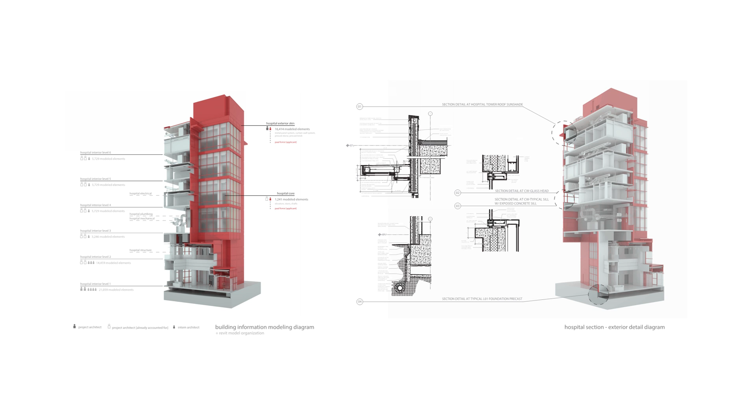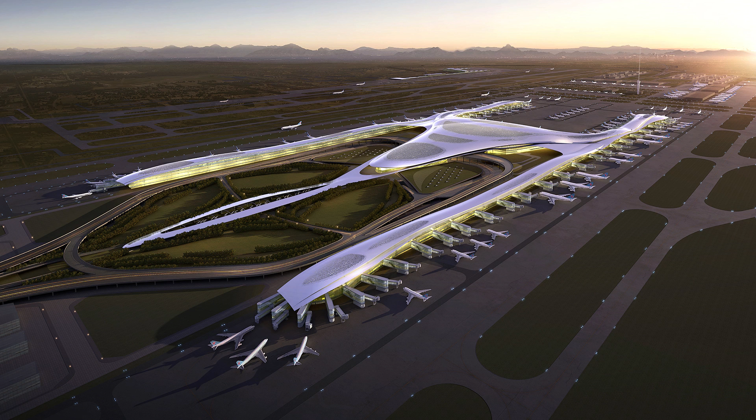The question we get an awful lot is, why is that necessary? Why would you ever need to do those things? Indeed, most of the work we do is capable of being built out of fairly regular construction assemblies. This is a project I worked on a few years back, and this is the definition of a complex project: Fort Hood Replacement Hospital in Killeen, Texas, roughly 1 million square feet. We had 30 or so subconsultants, and it took us 4 to 5 years to finally get it off the ground, and it just opened recently. This followed a workflow that was very repeatable, and after we got everything figured out, it was actually quite efficient. This works great, but occasionally we like to design projects that look like this. Then that workflow is not quite as clear-cut, and there's not a whole lot of dimensionable things going on. What we have is a lot of very complicated geometry that needs to be carefully communicated to the fabricator, and then we have to figure out how to build this as a kit of repeatable elements so it's not astronomically expensive.

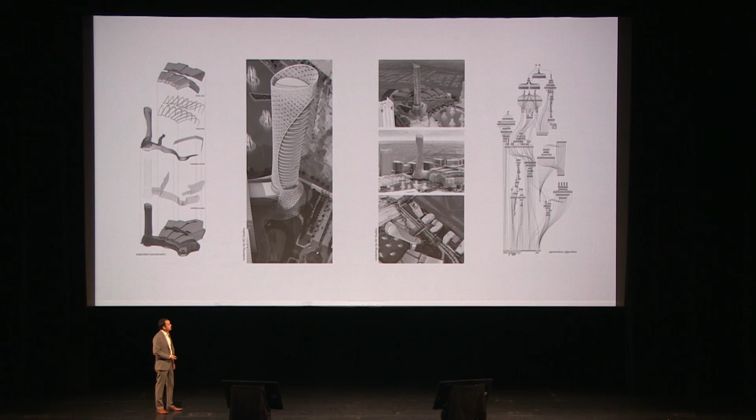Within HKS-Line, my role is that of a computational designer, meaning I use computer programming to manipulate data during the design process. That data is sometimes geometry, but it doesn't necessarily have to be. If you're building shapes that twist and curve like this, it makes sense to build them as a relationship of elements within the computer rather than as a fixed modeled object. That way, as the design changes, you don't have to rebuild everything. But the real benefit of this type of workflow isn't just making twisty, curvy shapes, although it is really fun and we do it a lot. The real benefit is being able to make things talk to one another that might not have been able to do that before, or were never designed to. So I'm going to focus on that primarily here.

So you guys are familiar with the new Vikings stadium. What you might not be as familiar with is the genesis of this one, and it actually started out looking a little bit different. It started out looking like this.

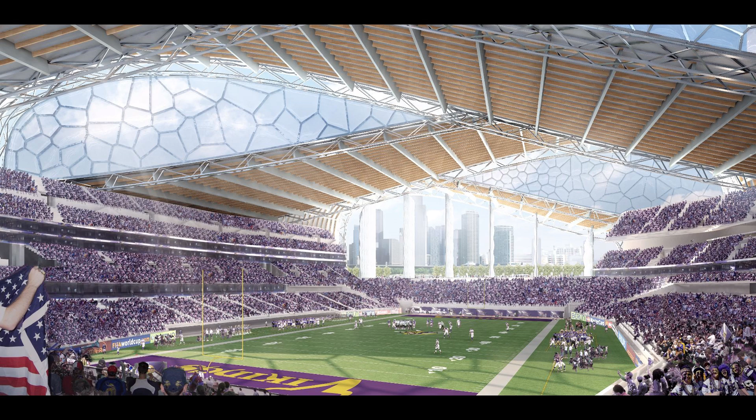My team produced one of the initial concepts for the design phase, and it's actually cool - some of the final elements made it all the way into the built project, like the big rotating doors at the end zones, and then the ETFE clear panels, although they're being used as part of a structural clerestory. But this project stands out in our mind just because of how fast we were able to do it.

We did this entire thing, including the renderings and everything, in about 4 days. It was by no means a perfect process, but we were able to define a very clear design direction and then add a very large amount of supporting detail quite quickly, purely through scripting.

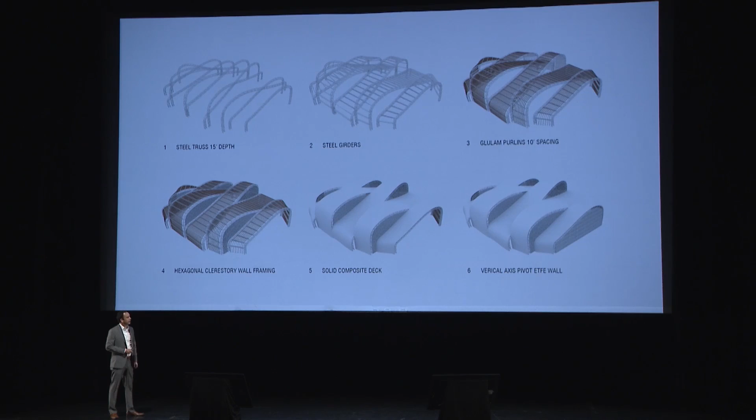So everything here is being built in Grasshopper. All of the elements here are basically being derived off of a series of 6 input curves that can control each one of these roof sweeps. Grasshopper is a plugin for the Rhino 3D modeler - it's very similar to Dynamo in many respects.

The coolest thing about this project to me was that those roof slices were not random. This was very deliberately produced in order to optimize the amount of natural daylight that was going to be falling on the playing field. We wanted this experience of playing football outside to be preserved, and we also wanted to make sure that we could block any direct glare from the players and for the fans.

So to do this, we hooked up the geometry of the model to a radiance-based daylight simulation, and this was the first time we'd actually been able to do this on a project. It's not uncommon to be able to build something and then simulate it, or run an energy model on it. But to actually make use of that as part of the design, so as you change something, you get instant feedback - that was something we've been trying to do for a while.

This is actually what excites me the most about the possibilities of computational design. It's what I specialize in within the Line group, and that is using the results of various simulations to iteratively influence how the design is going to finally progress.

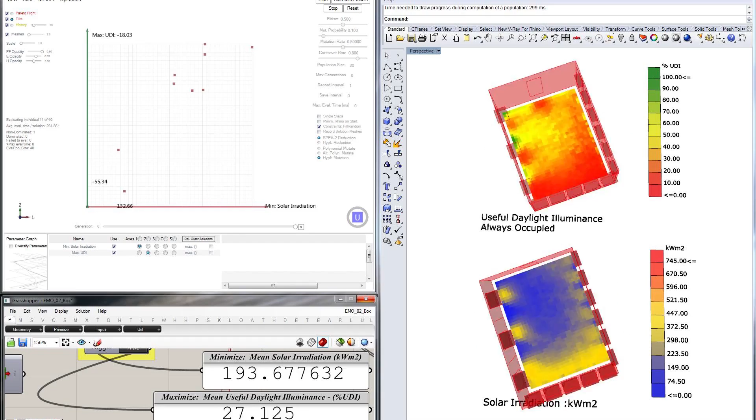This video looks complicated, but it's actually a relatively simple way to explain how that works. So what we're doing here is providing a series of simulations and then linking them to the creation of geometry to answer a question.

Right now I've got a very small volume. I've given it the ability to rotate back and forth, add and remove windows on all the different facades, and then also mess with the shading on the outside.

Then using something called an evolutionary solver, the computer looks at each frame of these simulations. We've got a useful daylight study and a solar radiation study, and useful daylight is described as daylight that's neither too bright nor too dark. For each option, it's going through and plotting the results up here in the left corner, and using an evolutionary solver, the computer can then start to understand which combinations of all these parameters will go together to provide the best results.

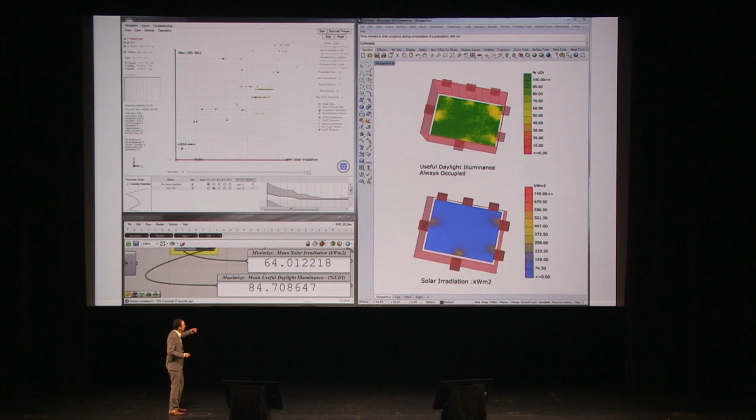You're in charge of defining what the best results actually are. So here I'm asking it to minimize the amount of radiation coming into the building, and then maximize the amount of daylight. It starts off bouncing around a little bit, but overall it starts to gravitate towards a solution that favors northern light, and then shading and minimizing the amount of light coming in from the south and the west.

This is something that makes sense intuitively. We would try to do this on our own, but the computer's actually figuring it out mostly by itself with a little help from us. Obviously this is answering just one question out of a nearly infinite number of questions you could be asking while designing a project. But the takeaway is that we try to use the computer for what it's good at, which is crunching numbers repetitively over and over again - and that frees us up to think more holistically about the design.

How can we make buildings that at a base level are more responsive and more sustainable?

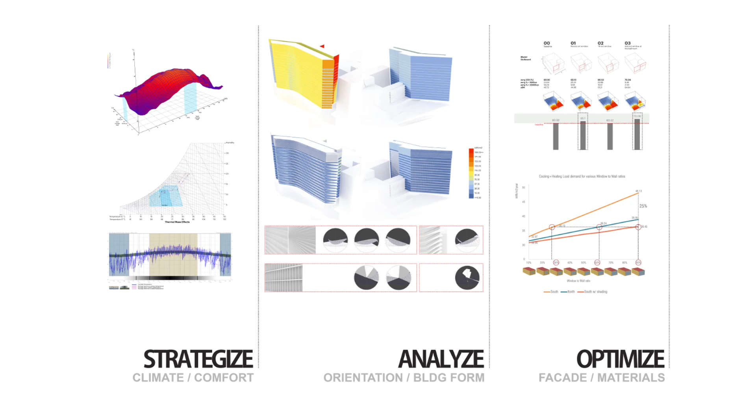To see what that looks like on an actual built project, this is San Francisco International Airport, one that we're almost finished with. We were brought in on the design side at the very early stages, and then after the project was secured, we became a consultant again. Here we were trying to figure out how to unify the workflow between the design architects and what ended up being a small army of sustainability engineers.

As this is San Francisco, they're very interested in the sustainability of the project. So what we were trying to do is look at every single design change we would make to the geometry and then see how that would play out in the overall performance of the building. This chart shows how work would flow from HKS and Woods Bagot, the design architects, and then flow into our mechanical engineers and our sustainability engineers.

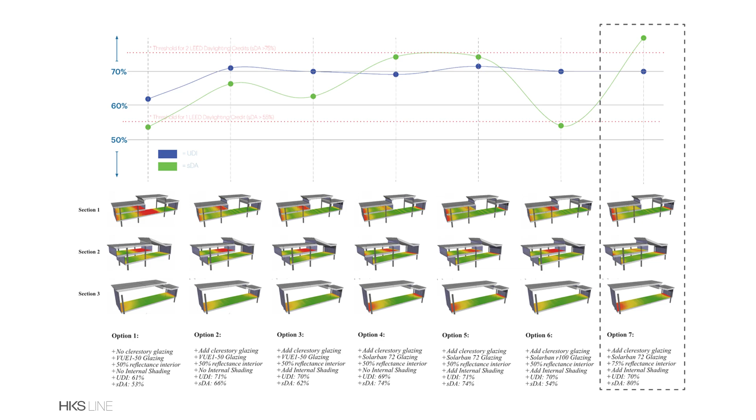Using Grasshopper as the intermediary between all of these different platforms, we were able to take each design option and very quickly run a lifecycle analysis, depicted here courtesy of Arup Engineering, and then also go through a conceptual level energy model as well as a passenger comfort evaluation. For things where we wanted more specificity for certain systems, that's where those evolutionary solvers come in.

This one in particular is trying to figure out if the building can qualify for the LEED V4 daylight credit. This is a small area for demonstration, but what it's doing is choosing shading options and running the series of LEED V4 daylight studies, which is spatial daylight autonomy and annual sunlight exposure, then charting the results to find out which ones will qualify.

I'm also defining a couple things in the upper left-hand corner that we're also trying to look at, which is bringing the shade area down to minimize costs, and then also switching out various spectral profiles of the glazing so we can see how that impacts the quality of the daylight. Lawrence Berkeley Laboratories out in California has a fantastic database of pretty much every glass type you could ever run into in North America, and we're testing some of our favorites there.

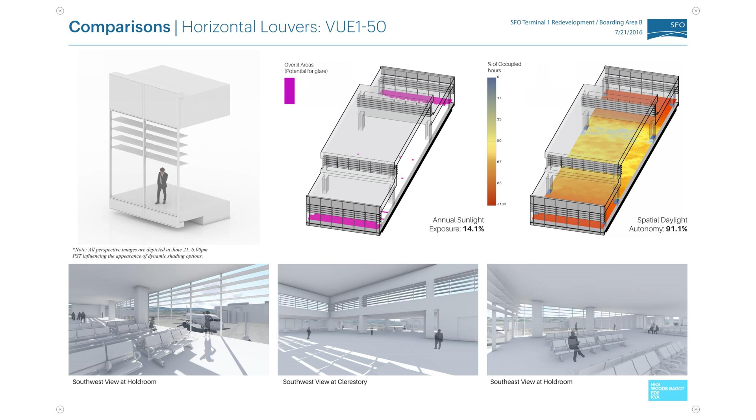The beauty of this is that you can look at so many more options than you would normally have time for given a compressed schedule, and then take the options that meet both the aesthetic and the performance criteria you're looking for, and bring them to the client with a very high degree of certainty that what you are providing is best for the scenario.

This next project is Kuwait Children's Hospital. This is the only pediatric care center of this size in the Middle East, and it'll be one of the largest ones in the world when it's done. While SFO was mainly focused on optimizing certain systems with analyses, with this one we wanted to use those same tools to provide more input in the design of the facade itself.

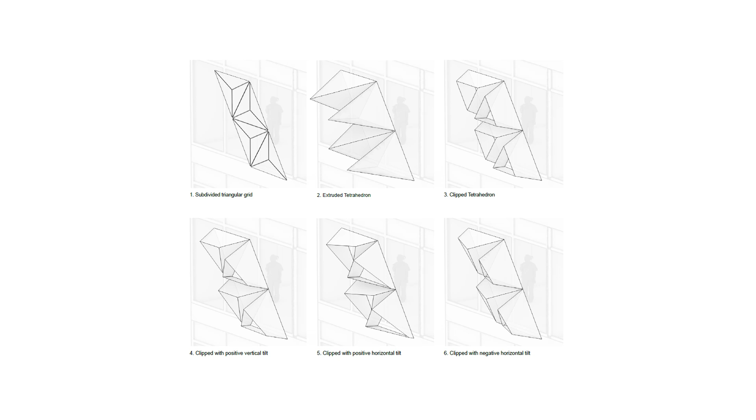One of the key design drivers for this project was that of a healing crystal, and you can see that language reflected in many areas of the interior and exterior. We started with this crystalline triangular grid for the facade, then developed a tetrahedral shading option and gave it the ability to twist and rotate with two goals: respect the program underneath the shade, but also provide a clear view to the Persian Gulf right outside the window.

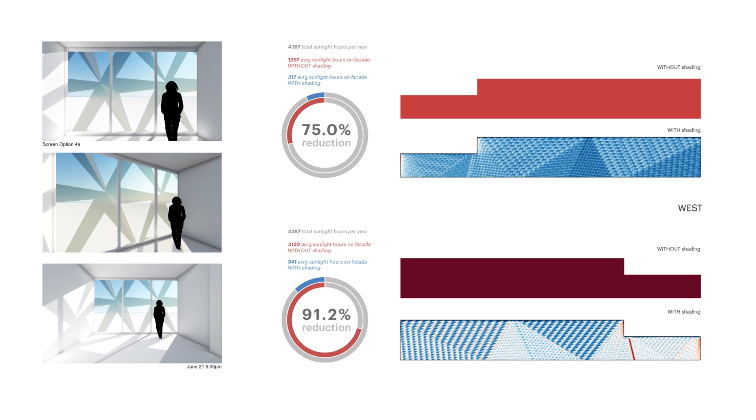It reduced the amount of insolation on the surface, which in the desert is a big deal, and we were able to maintain as clear a view to the Gulf as possible.

We also looked at the feasibility and payback of renewables, in this case photovoltaic arrays, both standard as well as BIPV. There's a chart that tells you the optimal orientation of a solar panel at any given point on the planet. But again, we used an evolutionary solver here to drill more specifically into our building and our context, looking at things like row spacing, rotation, and building overshadowing, making sure it makes perfect financial sense to put these panels where they go, because they are quite expensive.

At the end of the day, none of this really matters if you can't take all that information you've developed and studied and learned and apply it back to your final product, which as architects, usually that's a drawing set. This project was so large and spread out we had teams working simultaneously on 3 continents at one point, so we chose to use the Flux interoperability platform as a hub for all of our conceptual design information.

This is a screenshot of the Flux web interface, and we're creating all of our Grasshopper models and all of our simulations, throwing them in here as a repository, and then pulling out the stuff we need for the documentation model. Here you're seeing that same series of points being brought in, and we're developing the adaptive components that make up the majority of the skin. In fact, 80% of this building is made of adaptive components that are automatically generated off of that Grasshopper data.

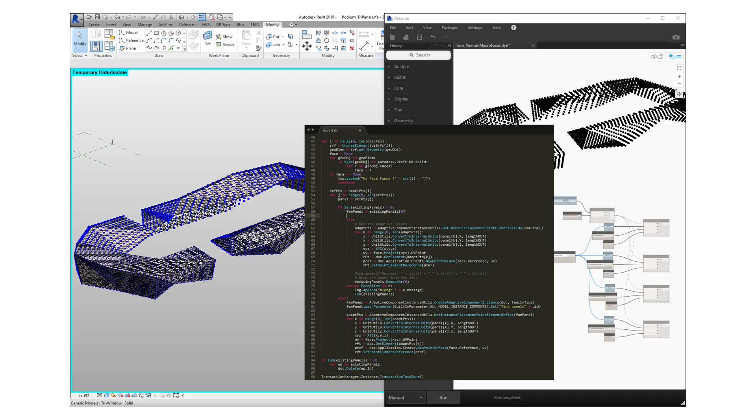The black window here in the middle is a Python scripting window. The reason we have that is the API of Revit is so large, it's massive, and Dynamo is still a relatively new way of looking at it. So oftentimes what we want to do with Dynamo is not actually set up to do that just yet, so we find that we're writing a lot of nodes to push and make that transition a lot more seamless.

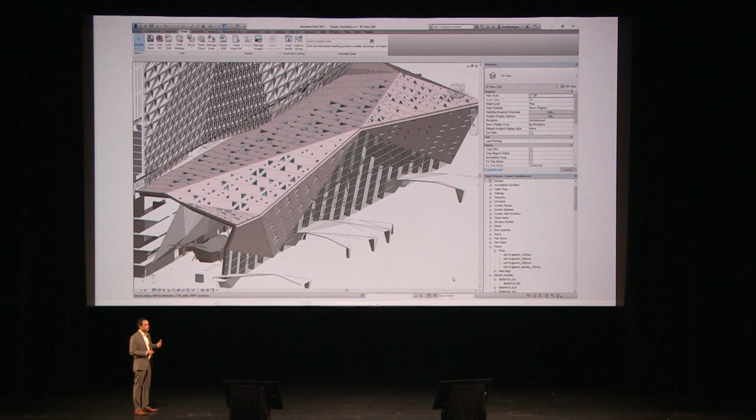But at the end of the day it's a fully functional Revit model that is directly connected and linked back to our simulation information. This is a fully connected workflow, so if someone makes a change in Grasshopper, it gets iteratively pushed into the Revit file, which is quite helpful because at the 11th hour of the 100% CD phase, I was still making pretty drastic changes to this facade based on new material information from our simulations. I would not have been able to do that - it would have been pencils down a lot earlier without this kind of workflow. So it helps in situations like that.

So we've been speaking about documentation challenges, and we go back to the Viking Stadium again. This is actually the project that inspired a lot of the workflows that I've just gone over in the last few slides.

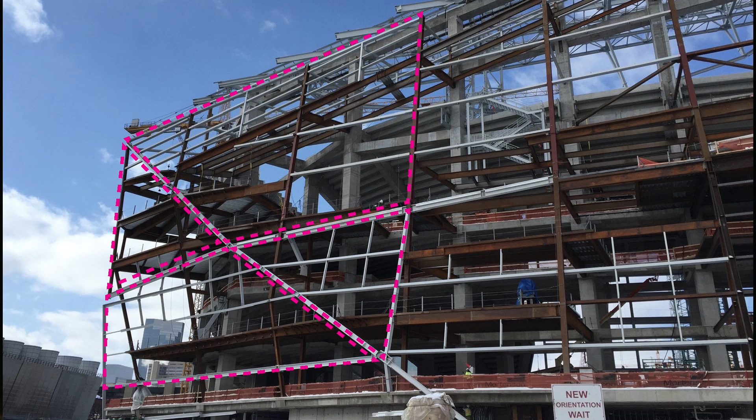Somewhere in the middle of the design process, in the documentation process, we realized that some of the macro surfaces of the stadium were actually curving in more than one direction. This became more of a problem as we tried to document the skin in Revit, because if you've used Revit, it really does not like twisting surfaces. So we went through several studies trying to reconcile putting a flat panel on a non-flat surface, and seeing how we could actually do that.

This is one of those studies - a growth algorithm that I wrote again in Grasshopper. What this is doing is taking a fixed panel and then arraying it up the design surfaces, trying to float the rotation and tilt within the construction tolerances of the panel system, which I think in this case was like 1/8 of an inch or something, just to see if we could actually physically build it.

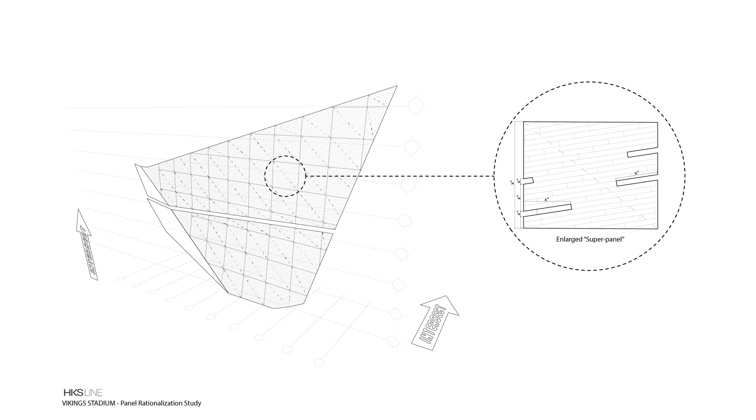That produced something like this that we could use in our documentation model, but there were still some serious concerns about how we were going to build it. Thankfully, working together with Thornton Tomasetti Engineering and Mortenson, we were able to figure out how to get these mapped properly, and they did a fantastic job of applying all the panels in the field. I mean, it looks quite good.

After Vikings, the concept of rationalizing non-uniform geometries into repeatable parts became a big focus for us, and it's a process we use quite a bit. We're using it currently on the Los Angeles Rams' new football stadium, which unfortunately I'm not allowed to talk about today. We're also using it on this development in Saudi Arabia, the Heart of Jeddah project. Each of these blue design surfaces is going to be made out of interlocking triangles, and right now in the design model there are roughly 30 to 40,000 of them, all completely different sizes.

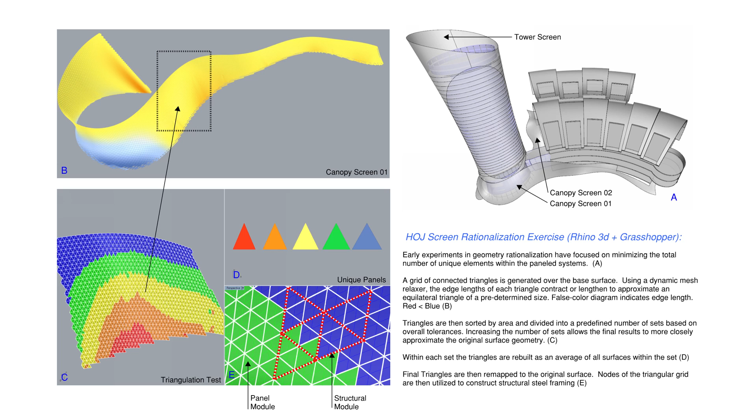So we've developed a rationalization algorithm that goes through and tries to bring that down to a more manageable number. In this case, we're able to go from that many thousands down to just 5 different shapes. And the process that makes that happen looks something like this.

We're now very firmly in the world of computer programming, and the goal here is to create one piece of software that can help with the design, but we're really trying to skip the documentation process entirely and take that file straight to fabrication, then start interfacing and writing G-code for the robots that are going to build and machine all of these different parts.

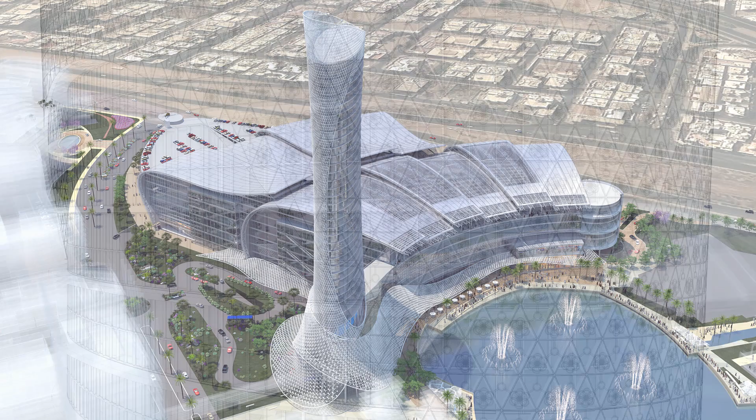To sum up everything, these projects are taking us in directions we would not have anticipated before we started. We found that the ability to remain flexible with our workflow is one of the most important things we have going for us. We like to remain platform agnostic, which is a phrase I'm not sure who coined, but it's a really good one. You find something that works for 90% of the stuff that you do.

For most of the work that our office does, Revit is the only tool we actually need. But there are some projects like these that need a little bit extra, and on these we're writing completely new tools, mostly from the ground up, to get those concepts actually pushed into reality. Thanks.

Thanks, Paul. Good job, thank you. Wow, computational design—that's fantastic, coming up with designs you may have never come up with on your own. Pretty fascinating, thank you so much. Now I really want to go to the stadium. Yeah, I totally want to go. Paul's presentation made me realize how envious I am of architects, and also how I could never be one at the same time. So once again, thank you, Paul, for presenting.

It was great to see your process and how you're using such tech to deliver projects, such as our wonderful new U.S. Bank Stadium. And we're somewhat staying within that project with our next presentation as well, but now from the contractor's perspective. All right, so moving on to the construction phase.

Our next presenter is Rick Khan, Senior Director of Project Solutions from Mortenson Construction, the general contractor on the U.S. Bank Stadium. Rick's focus is on enhancing today's project management processes with a strong focus on operational innovation for the future of construction. He leads Mortenson's integrated delivery advancement team, made up of over 60 VDC, virtual design and construction professionals, who drive and support the use of tools and technologies on projects.

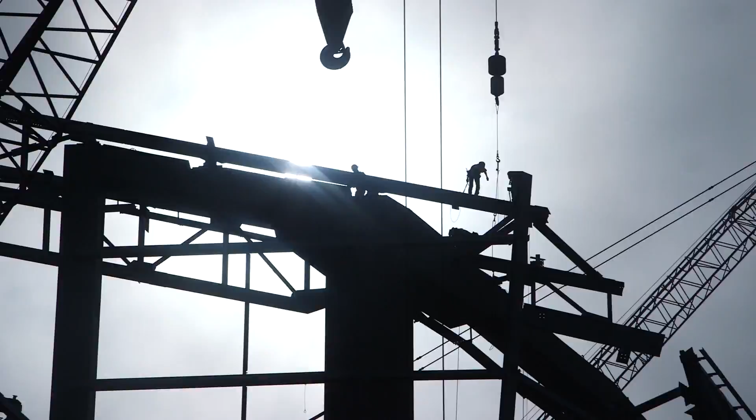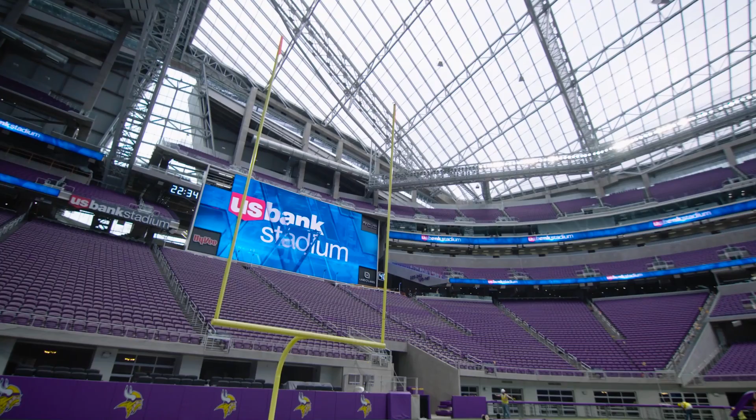All right, thank you everyone.

A little commercial to get you guys pumped up. It's an exciting project for our state of Minnesota, and it took over 8,600 people to design and build this project. So I'm telling just a small story of how we approach this complex project. A little bit about our company: Mortenson is a family-owned organization, 62 years strong, about 5,000 team members, and we do a diverse amount of projects. The things that get us going are the most complex projects—the more complex it is, that's what we want to sink our teeth into. And the U.S. Bank Stadium was no small feat to accomplish.

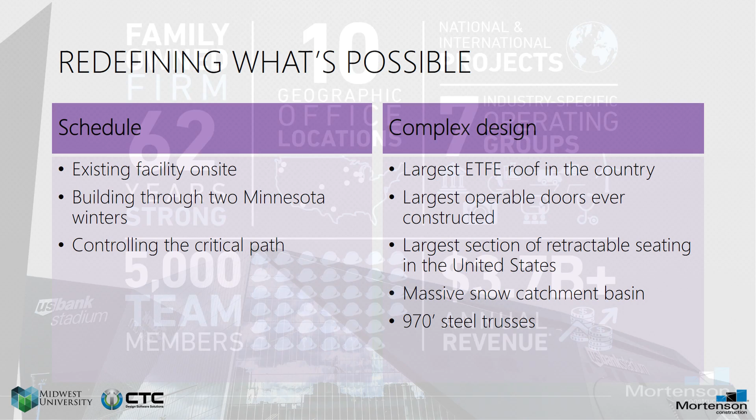The project has some key challenging elements. The first thing was time—we had to build through 2 cold Minnesota winters. We had an existing facility that we had to work around. And we had a lot of soil conditions.

We had bedrock at different levels within the project. We also had some very unique, complex features of this project, including the world's largest operable doors on a facility, the largest ETFE roof system that Paul talked about a little bit before, a massive snow catch basin, which is insane, 50 feet deep at certain spots, and a 38-degree grading angle that we had to accommodate for. And of course, this massive truss system that was a unique challenge on its own.

So you might think, what do we do to approach a problem like this when the design team has high expectations of delivering on the design intent, and our customer, the Sports Authority and the Minnesota Vikings, are hoping that we deliver on that promise? Well, it may sound super simplistic, but the reality is step one is building a plan. That plan is the key to how we successfully deliver projects of this caliber.

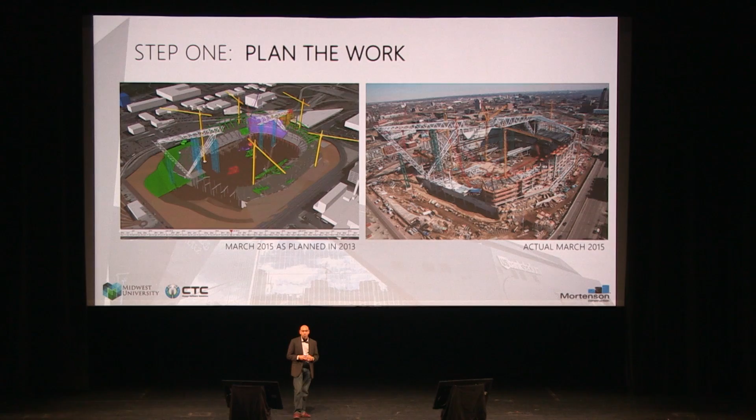And that plan starts off way in the beginning of concept and iterates throughout time. So the image on your left shows the 4D image of the plan from 2015, built in 2013. And you see the image on your right, which shows the actual.

Now, in a lot of cases, we had to really drive that critical path. So Mortenson was able to self-perform our concrete package, which was key to driving the critical path on this job, ensuring that all our trade partners, the folks who are really the experts, could help us deliver this project on time. So this is an example of the day-to-day technology we're using.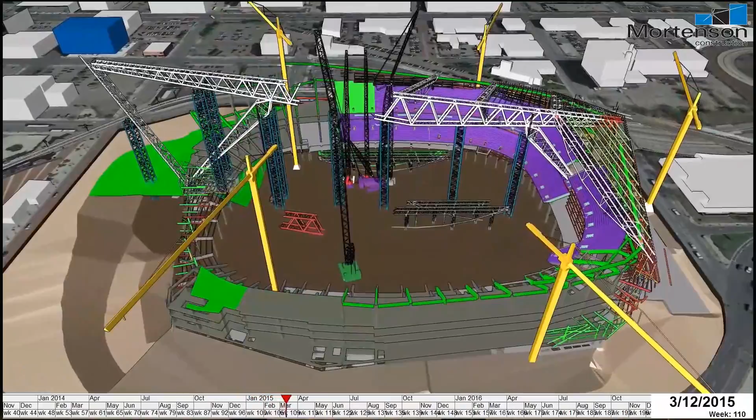The 4D plan is not something we just use for business development. It's something we use day-to-day. Our superintendents are driving this. There's over 100 iterations of this 4D model. This is the macro-level model, and you can see all the different scopes of work happening at the same time. For us, managing the flow of work is core to our success on any project.

At one time, there were over 15 mobile cranes within the bowl that needed to be coordinated. We were assembling the massive truss system, the shoring systems, as well as maintaining multiple crews of concrete to ensure that this project gets built on time. So this is just one example of how we're using that technology.

Again, it's not just a pretty picture and a cool animation. The superintendents are using this day to day. In terms of daily accountability, if you can't drive accountability to the plan, and if things get hard, and they always get hard and tough, we don't abandon our plan. We just shore it up.

But this is our pod meeting. It's a daily plan of the day meeting where we have all of our key trade partners, their supers, their foremen in, providing updates on their scope of work, holding them accountable and working with them to ensure we give them the support they need and remove the barriers, so they can execute work based on that plan. This is a meeting with Jason Brown and Dave Mansell, our key superintendents, orchestrating this massive project.

One team, lots of tech, one plan. Like Paul mentioned, being software agnostic is key. We get a lot of inputs, a tremendous amount of Autodesk products from AutoCAD, Revit, and Civil 3D, and all the other things as inputs from our design team. We also have a lot of our trade partners leveraging Autodesk products, or CATIA, like McGrath did, or Tekla. So from Mortenson's perspective, we have to be able to gather all those inputs, use a whole bunch of other technologies to ensure that we communicate that plan.

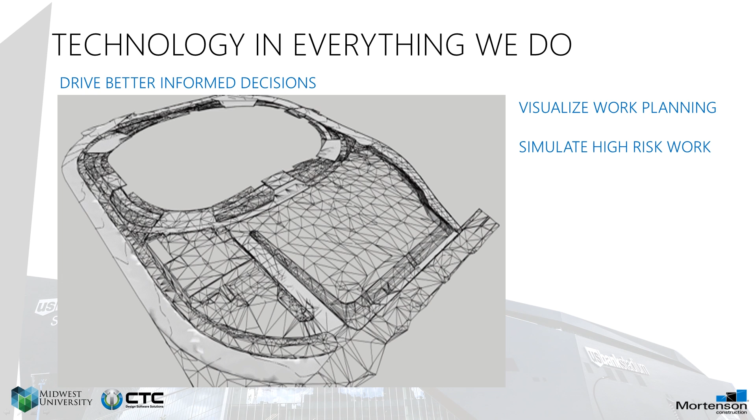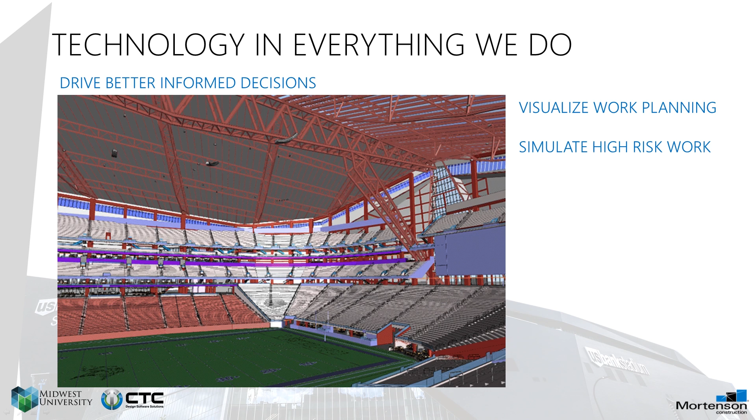So overall, we like to say technology is in everything we do. The reality is technology helps us visualize our work plan, and then we can simulate high-risk areas. That's really the core. The driver is to drive better informed decisions. It's all about ensuring that the teams can make the right decisions for the last planner, the last responsible person on the job site. So we use all kinds of technology, from mobile technology, cloud solutions, a ton of the Autodesk products, which has been a tremendous help for us, as well as a lot of other technologies.

In the beginning of the project, we needed to understand the existing conditions, so we implemented reality capture, laser scanning, and a number of other technologies to capture the existing topography and surrounding streets. This way we understand the existing infrastructure so we can better plan our logistics. This became a core starting point for developing our plan, understanding soil classifications and where bedrock was, and how the massive foundation structures were going to tie into that.

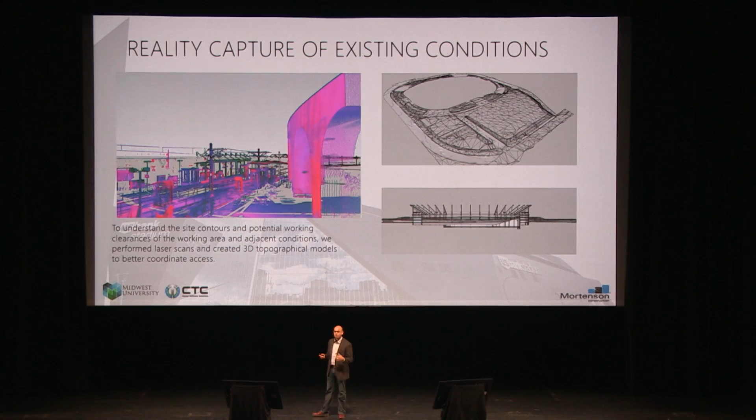All played a role in looking at concrete, which is the critical workflow, so we had to look at key areas. This image on the left is kind of misleading in terms of scale, but this is a 10 by 10 concrete thrust block that holds up the massive trusses on each side of the stadium.

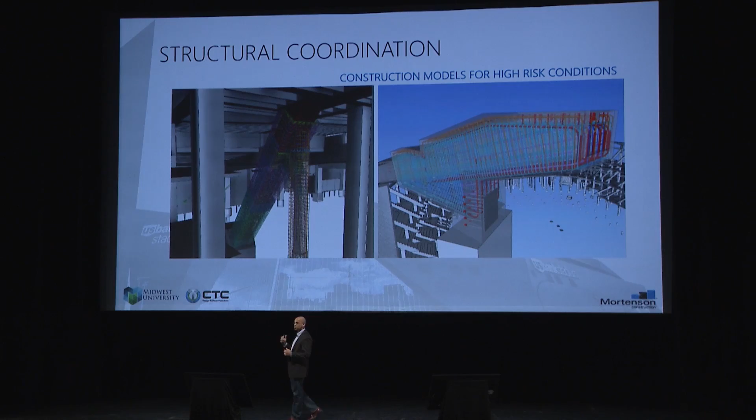We had to model the rebar. We worked with our trade partner, Harris, to ensure that all the embeds were placed right. The embed that holds up that thrust block is the size of a Volkswagen—a massive 3-ton embed that needed to be coordinated down to the anchor bolts, making sure all the systems connect. These are the type of things happening in the back of house that no one really sees, but that ensures we can effectively build it.

Looking at ways of breaking down the cranes, understanding how these cranes will fit inside the bowl, how we're going to break them down and move them, and making sure they stayed out of the way of logistics for assembling the massive shoring. We even looked at detail modeling of the pivot point and the operable doors. All these things are happening on a daily, hourly basis. We had a team of about 6 Mortenson VDC people on that job across multiple scopes of work, working with our trade partners and design partners to help ensure this was constructible.

After we're done with our coordination process, since we self-perform that type of work, we take that information and dumb it down into a digital 2D workflow, so our concrete crews know exactly what to build and how the systems are coordinated. We used Autodesk Point Layout a tremendous amount, understanding where the embeds were around these concrete systems.

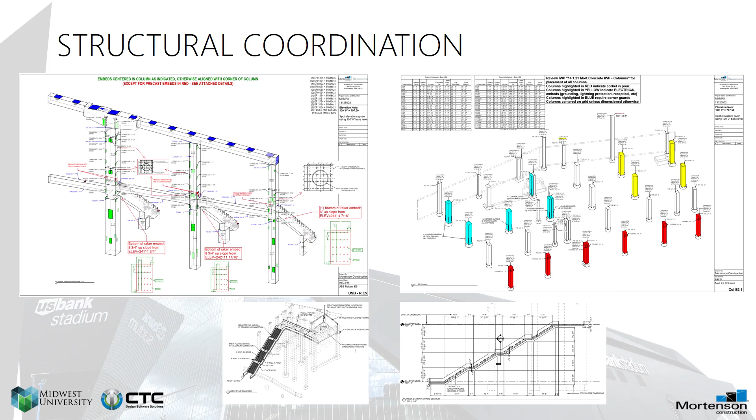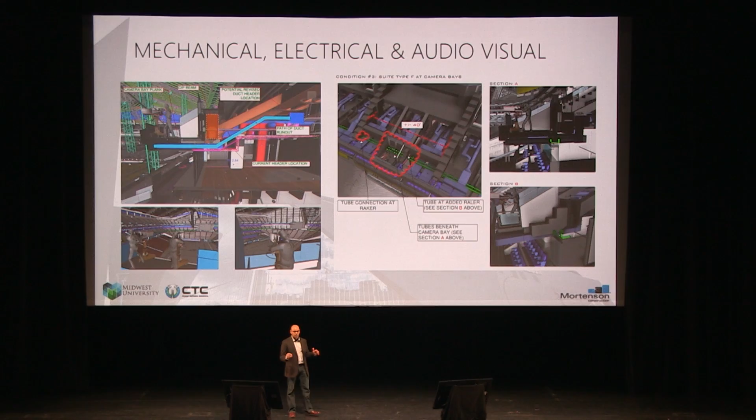We've always heard the term 3D coordination and MEP coordination. We like to talk about total building coordination, because the purpose isn't just to make sure things fit in confined and closed spaces, but really making sure the design intent is met by the construction process. That means tying into the audio, visual, and entertainment systems, making all these things operable. That's our goal in terms of 3D coordination—it's not just to fit, it's to make sure it's maintainable and operable. That was a tremendous effort from our trade partners and our team.

And of course, the enclosure—it's a beautiful enclosure, a fantastic facade. There was a tremendous amount of detailing that went into it. Paul touched on it a little bit. Because of the way the angular enclosure was built, we actually had to work with McGrath, the enclosure contractor, to understand the profiles, so we could connect the primary and secondary steel to the enclosure panels to ensure we maintained that complex structure.

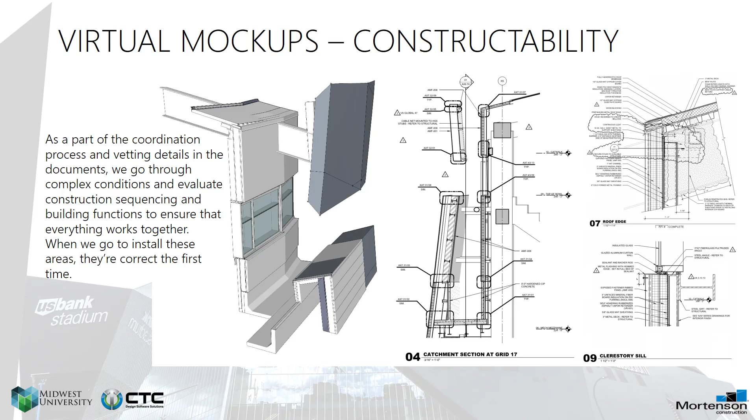These are just some of the types of modeling we're doing. We're taking the design information and the beautiful detailing in 2D and trying to create a model that represents that at a real scale, so we ensure that the flashings, fastening systems, and all the interfaces with water barriers and vapor barriers are being met in the detailing process. This is what we give to our teams to then go and build.

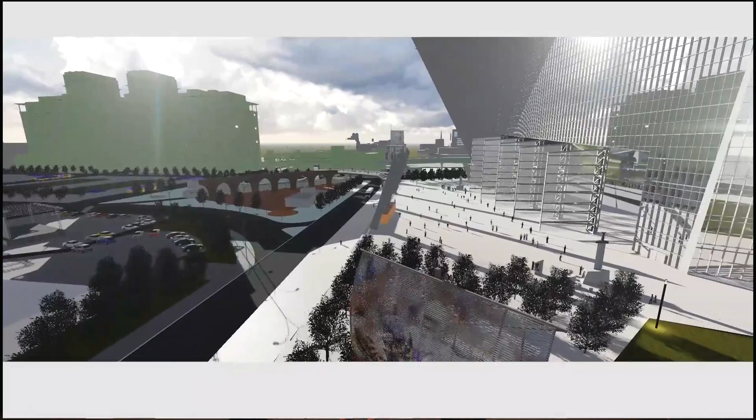Our models were pretty complex—it was a federated model, about 150 different models that made up the overall process. But the goal is to visually communicate, so we can execute right the first time. At the end of the day, we're just visualizing to communicate. The idea behind the visualization is to help us better communicate, which drives better collaboration within the team, which leads to better informed decisions. Getting the last planner to make the right decision at the right time as this project evolves is key to that process.

So in finishing up, I just wanted to show a quick video in terms of how our team looked at this project from a planning perspective.

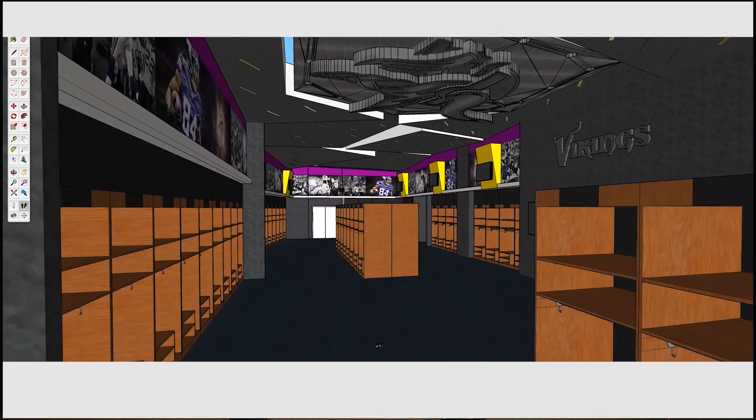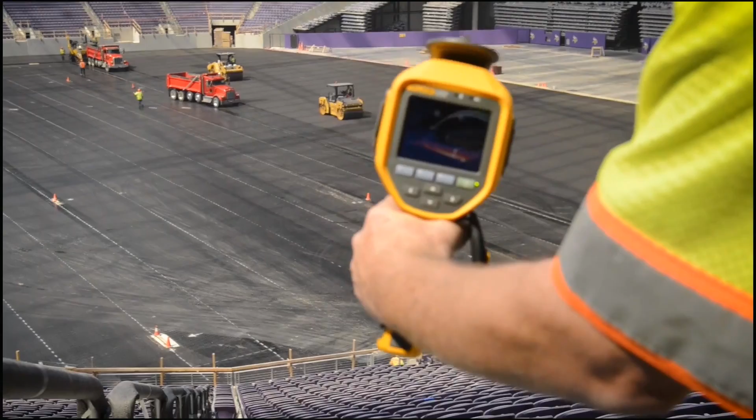When you win a project of this size and complexity, where do you start? You have to start with a plan. We spend more time planning, which equates to less time building. We utilize the most advanced tools in the industry, implement lean planning strategies, leverage our sports expertise, and hire the best people.

Mortenson, with the technology they have and the way they're able to show the job as it's going, makes it easier for every sub. You have a plan, and it's a pretty set plan. It makes everybody's job much easier. The job gets done in time, people are safe. With the planning so far in advance, a year in advance, we're able to plan for overhead, equipment, and everything else based on using that technology.

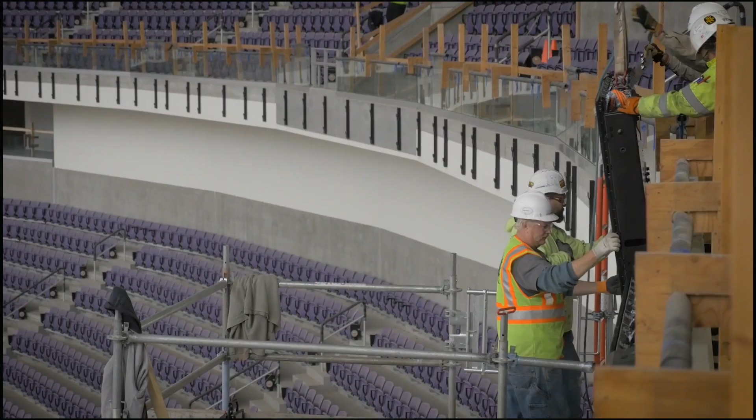Created by adding the element of time to a 3D model, the 4D model allows us to simulate hundreds of solutions and optimize the plan to create the best plan. It helps us visually communicate our plan to our trade partners and better collaborate and execute that plan.

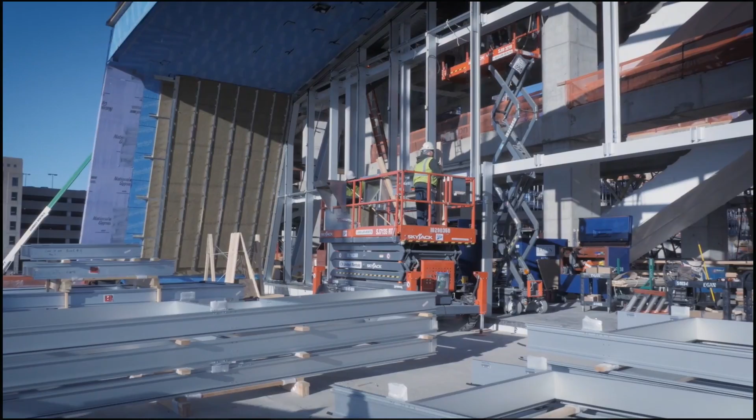The amount of technology used on this project, down to the day on every task, was quite the process and done very well. Having up-to-date drawings at everybody's fingertips was very important, and it was easy with the technology used, from the submittal exchange to the punch list. Everything was digitalized and easy to pass along. With all the different trades, it could be very easy to get documents lost. They did a very good job with the technology available to maximize that process.

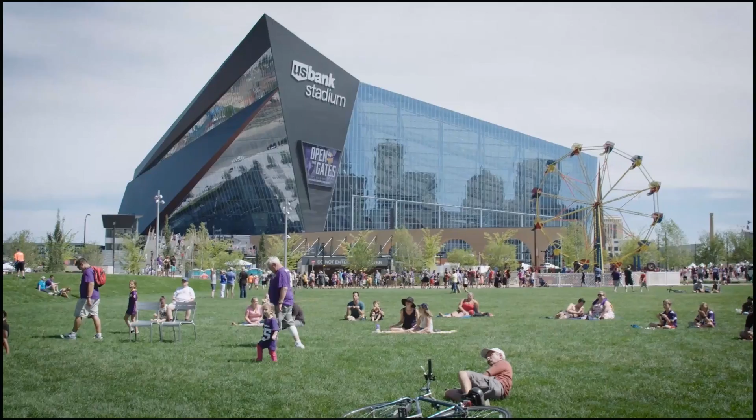Without 4D technology, construction would have taken a lot longer. Costs would have been accelerated. Mortenson had committed to using personnel familiar with this technology, and we ended up having the building before we even anticipated getting it.

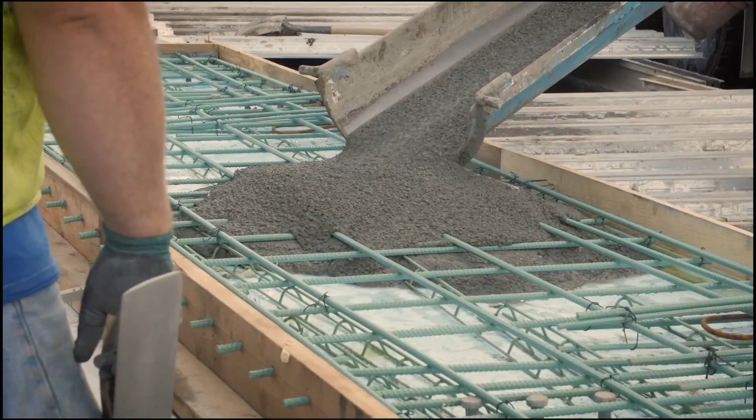Virtual reality technology gives us and our customers the ability to visualize completed spaces before any construction has begun. This is a critical tool to make informed decisions while saving time and money and creating the best possible solution. In addition, lean construction and quality prefabrication of materials advance the schedule more than traditional building practices. Our ability to identify opportunities to prefabricate materials and produce project components off-site absolutely delivers this project faster and with the high quality we require.

These tools, in conjunction with a comprehensive plan, are the reasons we were able to build the US Bank Stadium in a way that delivered the best value for taxpayers and the Vikings, while creating an iconic building resulting in early and under budget completion.

So redefining what's possible. We like to say we don't compete with our peers in the industry. We compete to what is possible. And that's what drives us. And it took a Herculean effort, over 8,600 people to design and build this project.

To deliver this project 6 weeks early, $6 million under budget, and at zero punch list on opening day. That is unheard of in the sports business. But we weren't able to do that without the partnership we have with our design partners and trade partners to be able to deliver this project at this level.

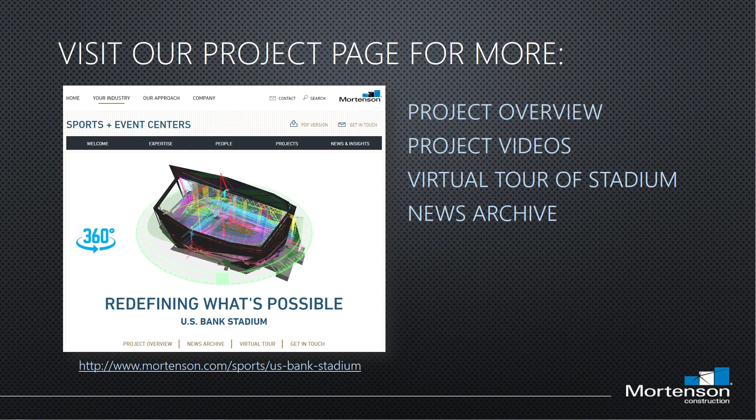Thanks, Rick. Thank you.

Wow, early and under budget. That always happens. They can build football stadiums. I wonder if they could help out with the offensive line. Now I really want to go to that. But yeah, that was excellent, Rick. That's amazing. Yeah, we really appreciate that amazing inside look at your processes.

It's certainly a challenging project with lots of risk. Awesome to see how you guys pulled it off, delivering it under budget and ahead of schedule.

Our next presenter is from ISG. They're a multidisciplinary firm with 230 employees, 8 offices across the Midwest. We asked them specifically to present on virtual desktop infrastructure, as we see this as a growing need among our client base as projects and firms are requiring to work more collaboratively from any location.

Right, right. And I mean, how many of you come from the IT side of things? Or my IT folks? Are you just afraid to admit it? Or... No? No one's gonna raise their hands? No? Some of you? I know there's gotta be a few of you. Okay, all right, okay. So we all know the value of a great IT department. We certainly know what happens when we do not have a great IT department, right?

And as we work more and more with different types of software, and we have more variables that we throw into the mix, such as remote users or working with dispersed project teams, and of course now that we have the cloud, a great IT department is more important than ever.

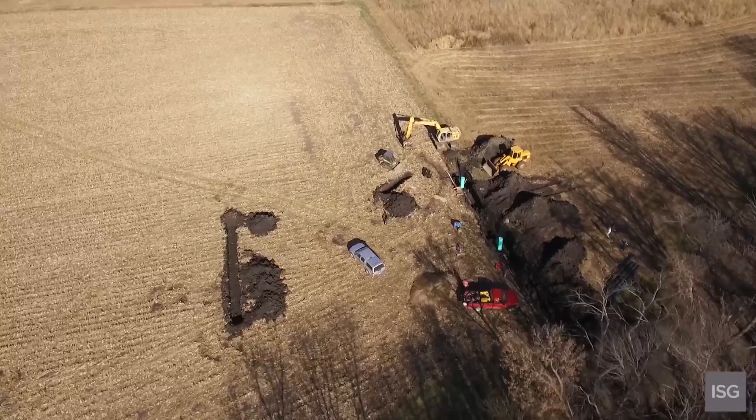At ISG, we've built our firm on ingenuity, innovation, and virtualization that has fueled projects across the nation. Through integration with virtual software and desktops to Autodesk, ISG has helped support efficient architecture, engineering, environmental, and planning solutions that have positively impacted communities and clients for the past 44 years.

Hi, I'm Chad Surprenant. I'm president of ISG. We look at technology as a way to differentiate ourselves. Historically, we've utilized technology to stay in front of things, be able to deliver our designs in a better fashion. And then over the last probably 5 years or so, it's been a huge transformational time for us.

The way we've been able to use our VMware has changed our way of delivery from something that was at one time more of a geographic-centric focus, and now we've actually changed our company so much more to a client-centric focus. By utilizing VM, we can be doing our work absolutely anywhere throughout the world.

Looking for ways to intimately connect clients to their projects, ISG has worked to instill a culture that promotes collaboration and flexibility, which translates into better results. ISG strives to not only continually push for success from our professionals, but also have technology that supports such efforts. We want to empower employees with an accessible and reliable solution that meets the demand for flexibility in today's workforce. VDI gives our employees the ability to run their work desktop on any device from any location.

The future possibilities in the A&E industry and technology to support such services are endless. Through intentional and strategic engagement, ISG will continue to push boundaries and empower professionals that will turn visions into reality.

Good morning. Welcome. I'm Eric Eby, Director of Information Technology at ISG. And I was asked to talk about VDI and virtual desktops and how ISG successfully runs VDI in an Autodesk environment.

So virtualization. We've all heard the term, whether that be cloud computing, as mentioned earlier, companies like VMware, Microsoft Hyper-V, Citrix. Virtualization at its core is simply running multiple servers or desktops on a single hardware host.

VDI, or virtual desktop infrastructure, is exactly that. It's running your work desktop virtualized on a server that sits in a data center, whether that be on-premise or in the cloud.

It's become mainstream in the last 5 years, and just within the last 3, they've introduced dedicated graphics. And that's what really allows us to run Autodesk products.

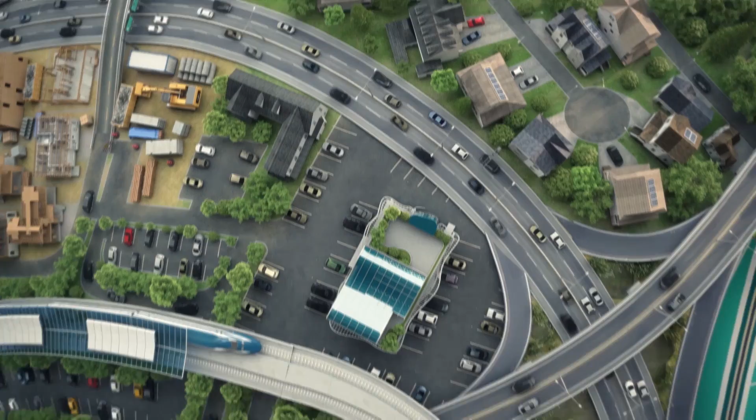So let's go ahead and talk about entering the era of connection. We've talked about our individual workflow solutions advantage for several years, the depth and breadth across the life cycle for building and infrastructure projects. But now the I in BIM is more powerful than ever. Information is everywhere, sensors are everywhere, and now everything can be geolocated. We are able to connect our solutions like never before. So let's take a look back so that we can better understand where we are headed.

Pretty cool video, huh?

More than 30 years ago, Autodesk software helped shift work from the drafting table to the computer with AutoCAD. We call this the era of documentation, helping designers, engineers, and contractors leverage digital technology to move from error-prone, inefficient manual processes. DWG became the standard in the industry.

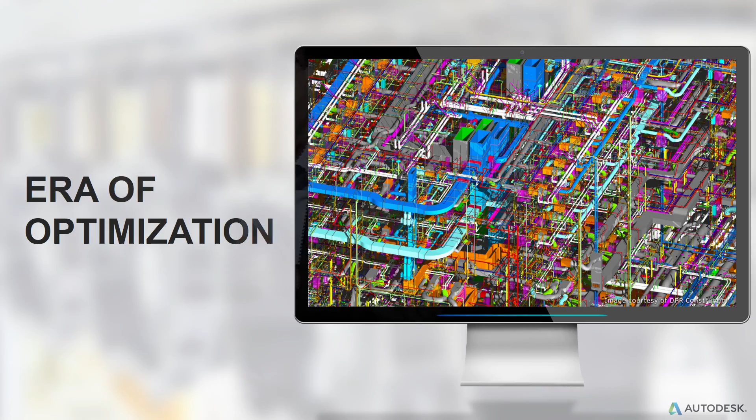Digital modeling technology then ushered in the era of optimization, along with building information modeling, or BIM. When we moved from 2D to 3D, Autodesk invested strongly to help the industry transition to BIM, and we're still doing that today with products and workflows that help visualize, simulate, and analyze designs before we break ground.

It's worth mentioning that we acquired Revit 15 years ago today. Isn't that amazing? How time flies.

And now we enter the era of connection. It's a new opportunity for builders, designers, engineers, and owner-operators, one where digitalization, the power of the cloud, and big data are changing everything, where the boundaries between planning, designing, and building are disappearing.

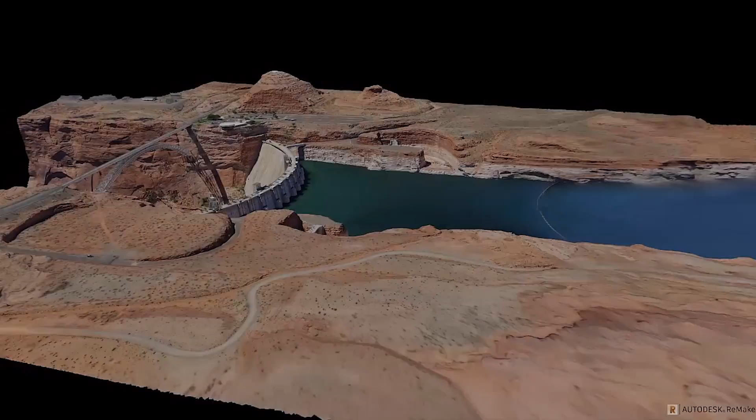The first trend is higher definition surveying. Current surveying methodology remains one of the major reasons why projects are delayed and go over budget. New technologies such as Autodesk ReMake, which integrate high definition photography, 3D laser scanning, and GIS, can dramatically improve accuracy and speed. This is another example of connecting digital and physical.

This is the Glen Canyon Dam, one of the largest man-made reservoirs, and a vital defense against severe droughts. This model will support education programs for operations and maintenance for years to come.

The second trend is around machine learning. Machine learning is a type of artificial intelligence that provides computers with the ability to learn without being programmed. Imagine if you feed these programs with past project information, what we can do.

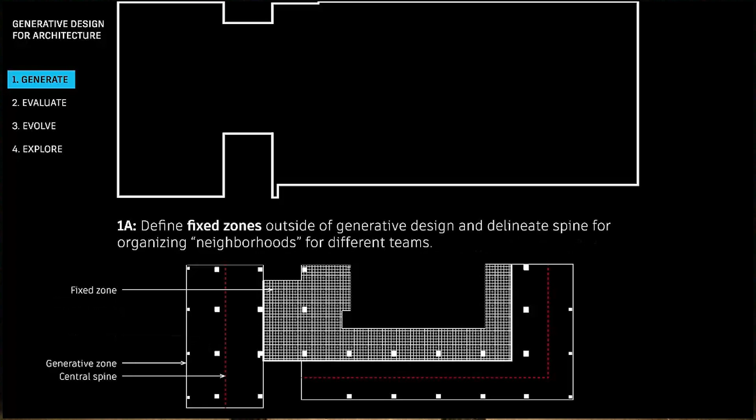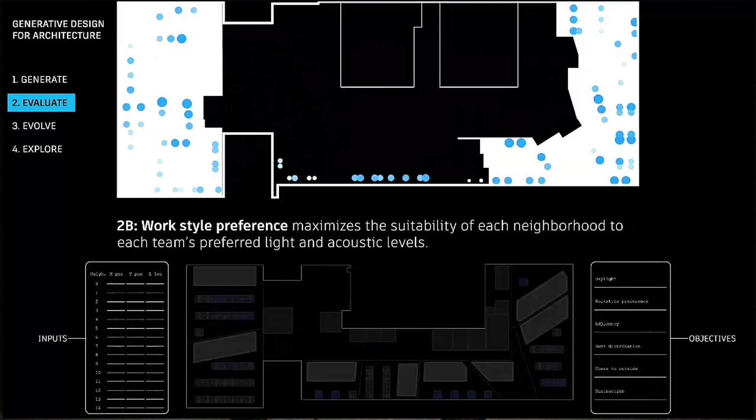This is a layout of our new Autodesk Toronto office. We did surveys of the employees, identifying work requirements and preferences up front, and we had to understand our design goals for increased productivity and collaboration. We then used generative design to lay out alternative designs and optimize for the best outcome. This learning will allow us to enhance the software you already use today. And by the way, we ended up with a pretty cool office.

The third trend is around digital visualization, mentioned earlier. Virtual reality is being adopted at an impressive speed. You've seen many phones that include headsets just in the last year. This is becoming a reality within the AEC segment as well. Let's see an example.

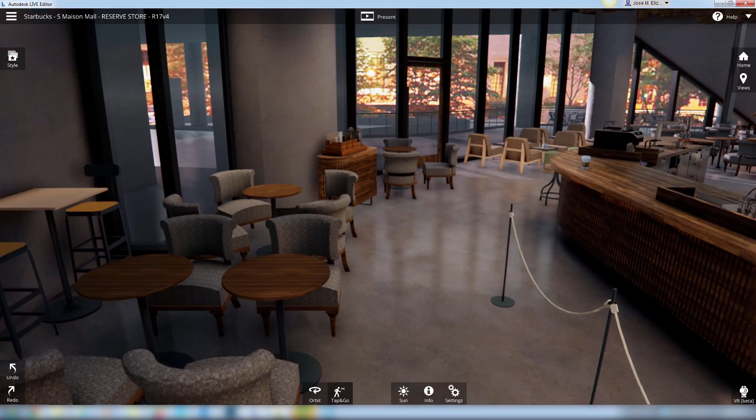Imagine immersing yourself in a coffee shop well before any construction begins, understanding experiences, lighting, layout, product placement, and much more. The accuracy and level of detail has come a long way, making this usable, even being able to provide field workers with a visual tool. Kind of makes me want to get a cup of coffee.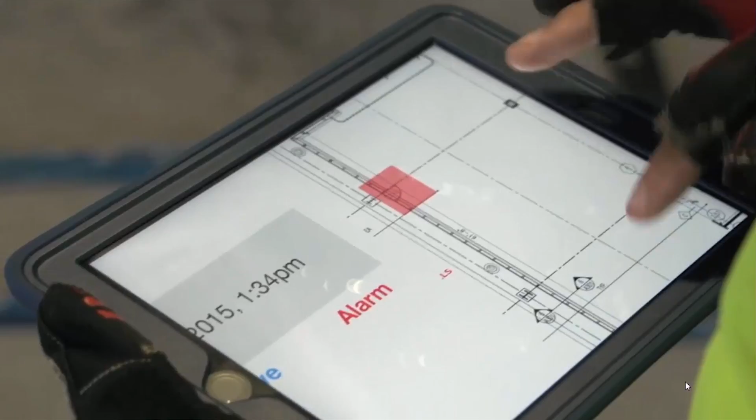This is Redpoint, an app designed to increase safety on the job site. Imagine if you could outline an area on a mobile device and then equip workers with a sensored vest that alerts not only the foreman but the workers when entering unsafe areas. This is another great example of connecting the digital and physical worlds together. Think of the possibilities—pretty cool.

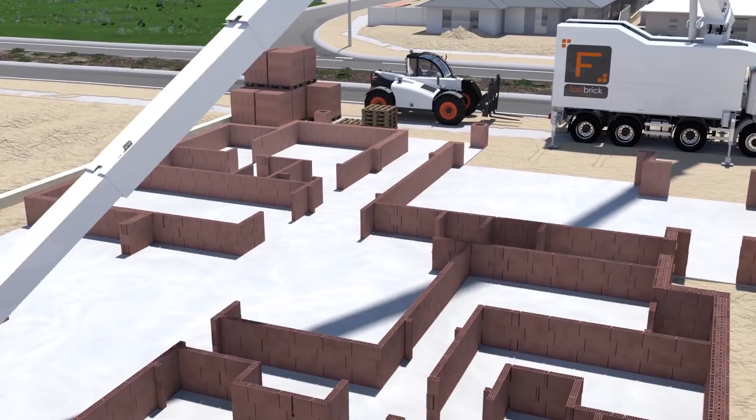3D printing technology has shown great promise for as long as I can remember, but now it's becoming reality. Fastbrick Robotics is pioneering innovation in construction, bringing this same technology on a larger scale to construction. Think of the quality, the cost savings, the benefits of such technology on the construction site—I think it's pretty amazing. Who would have dreamt that 3D printing technology could reach this level? Fastbrick Robotics—what are the possibilities? Really cool.

Autodesk is at the intersection of the need for more buildings and infrastructure, and at the same time, the democratization of technology. We are taking the lead in making these digital technologies relevant and valuable for our customers.

Now I'd like to turn this over to my colleague, Angi Izzi, who's going to show you what the era of connection means to our current product strategy as it relates to collaboration. Angi?

Thank you. Thanks, Ken. This is only my second invite to Midwest U, so hopefully I'll get a couple more invites in the future. Love being here in the Midwest. Thanks again for having me here.

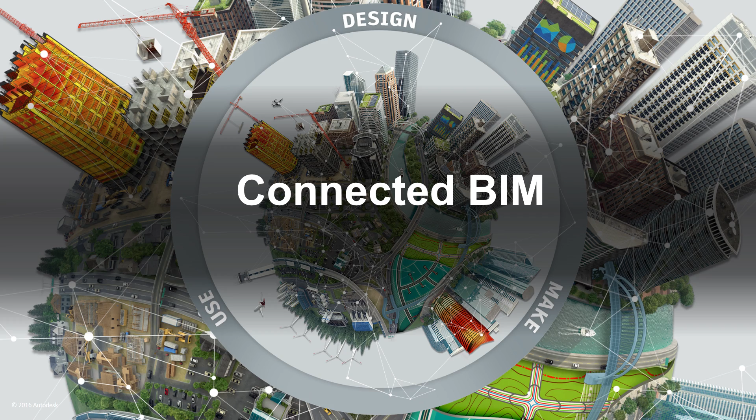As you saw earlier today, BIM was part of the success for this stadium project. This is really about enabling the entire lifecycle for design, build, and operate to seamlessly be connected. But what does connected BIM mean? It's not a product, it's not a process—it simply describes the potential value of BIM in tightly interconnected workflows, spanning design, build, and own processes for buildings and infrastructure. It's really about enabling Autodesk to help provide you software to do that.

So BIM is the power of the cloud. It really allows us to look at a couple of things. We look at insight—really being able to have bidirectional information, like the coffee shop, for instance, providing insight into what's going on, what the building's going to look like. It enables continuity—real-time access, understanding in a common place what the most up-to-date design is. And then collaboration—being able to, in the mobile world we live in, have anytime access to that information.

Imagine a design project so complex that it requires dozens of stakeholder groups from across the globe to deliver it. And imagine them collaborating seamlessly to deliver a world-class building ahead of schedule and under budget, regardless of location, discipline, or software tool sets. Imagine them working together in a single project ecosystem—planning, designing, building, solving challenges, and making swift decisions based on deep insight—driving up profitability, driving down coordination issues. Welcome to the future of project delivery.

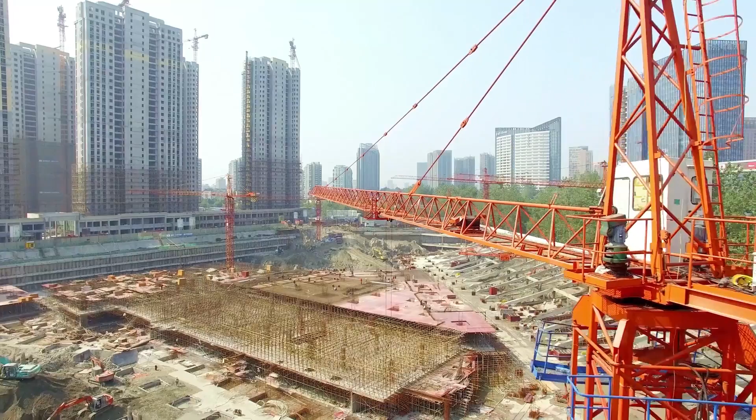This is the Autodesk Cloud made fluent in BIM. Beyond a place to simply store or share files, it will be the foundation for how teams deliver projects. Here will be a single project environment where design and construction teams will collaborate, design, review, and build as if in a single location. Here, insights into clashes, model changes, and quality control are easily accessible. Here, independent systems and toolsets work as one. Here, the design and construction teams are connected, with project documentation available in real time to those in the field. And here, all stakeholders are provided access to the right version of the right data in the right context and on the right device. When it comes to delivering projects, it is often the process that defines the success of the project. Welcome to a better process.

Welcome to the future of project delivery.

Pretty inspiring, huh? This really excites me. It makes me really proud to be working on this project.

So we want to talk a little bit about the trends that are driving this, the trends around project delivery. It really is around owners realizing the BIM mandates that are coming from owners today, and then understanding the greater project savings and the advancement of new standards. This is really important for driving the success for project delivery.

The other thing is designs are optimized. There's this high frequency of information that comes across the projects. You notice that in the stadium project, the information, especially on the generative design area, really have to be able to manage that information. And then the third thing is really around the distributed teams. It really is a great idea to be able to use the distributed talent from anywhere that they possibly can be across the world. And this is really driving this project delivery mechanism that we're putting together.

So let's take a step back for a moment and let's talk about how our customers deliver projects today. There's this massive amount of coordination that takes place, risk mitigation that takes place on all these projects. And we really need to understand how they go from design to documentation to construction handover and be able to use all that information to have the most up-to-date information, really around data management. And our portfolio today supports a lot of these projects during the phases of these projects.

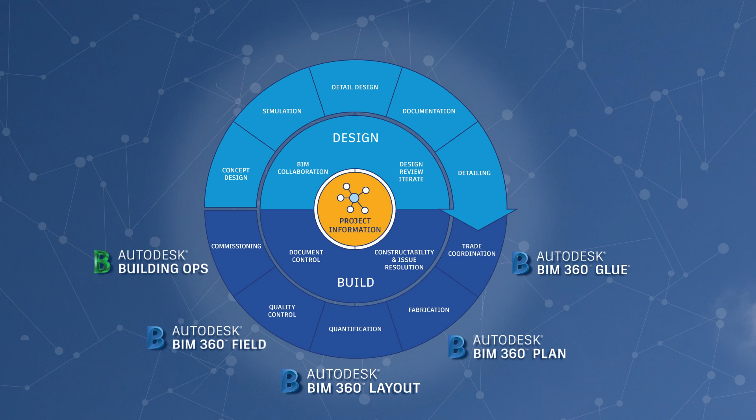So let's start with our established tools, really around certain tools that we've created for construction. Let's kind of start looking at these first. You heard a little bit about them from Mortenson today. Glue, field, layout - these are really around digitizing the construction site. And last year, we brought Autodesk Docs, we brought BIM 360 Docs to the field, really allowing construction documentation management.

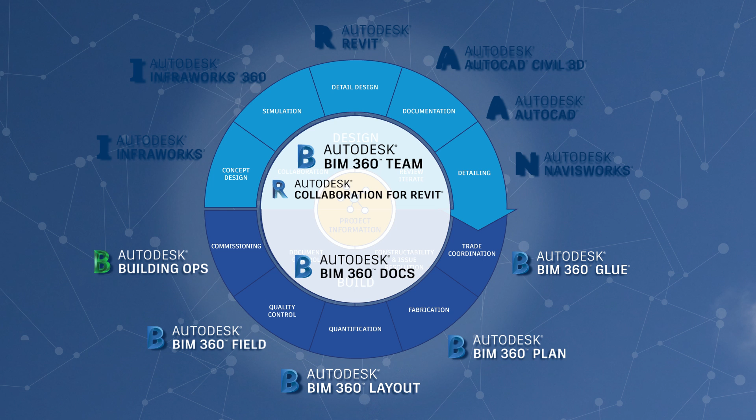Moving to the top, we actually have all these world-class solutions that we've had for authoring tools for many years, and now we're starting to connect them together in new, meaningful ways. And last year, we brought you BIM 360 Team as a way of connecting teams with Collaboration for Revit. Collaboration for Revit has really been the best-in-class cloud solution for allowing teams to collaborate together.

I'm here today to make a big announcement. The big announcement is BIM 360 is going to become our common data layer. It becomes our new brand for design, build, and operate, not just the construction tools. So this is really around allowing customers to really have alignment around the design, build, and operate of a building.

But that's not it. This all has to be in one common data environment. And we really, I shared with you that we have made this brand, the BIM 360 brand, our common data layer. But it really is not done. We're not done yet, because right now we kind of have a bifurcated stack. We have two separate offerings. We have the BIM 360 Team and the Docs.

I'm here today to tell you that we're combining these. This year they will become a unified stack. This will be a common data environment for designers, owners, operators, and construction to come to one place to work. This is very exciting for us.

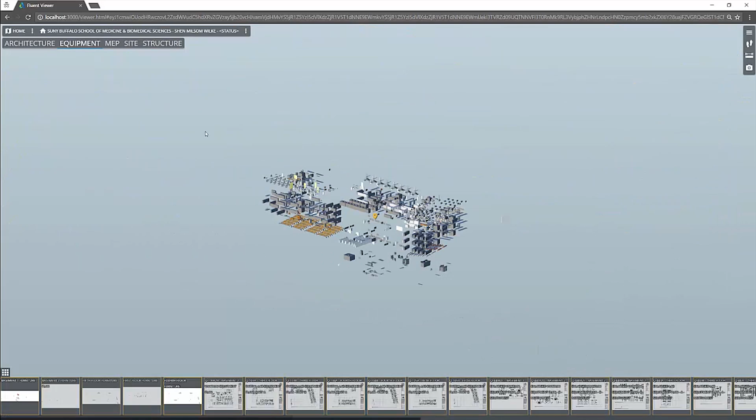I really wanted to come and show you kind of a product teaser. So imagine you can be in one model, in one interface, and be able to navigate through hundreds of PDFs, as you see across the bottom of the screen. Navigating in a hypermodel way and delivering project information the way teams think, in different scopes of detail and for different scopes of work. Imagine eliminating silos and improving coordination, really enabling customers to clearly reduce friction, deliver a virtual co-location experience, and enable deeper insight into the project. That's what we're providing. That's what BIM 360 will become.

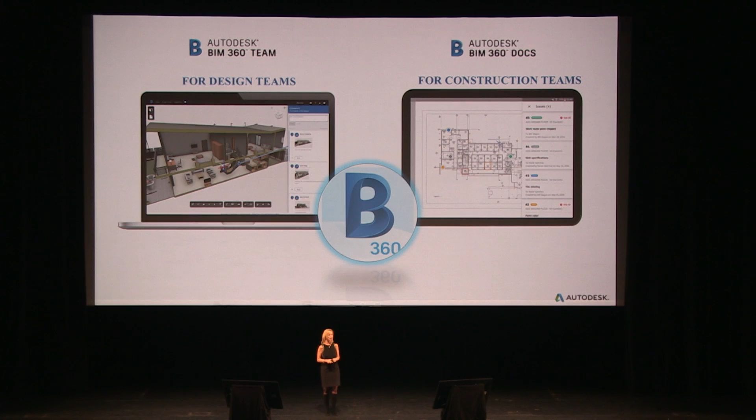Before I leave, I want to make one point. Today in market, we have BIM 360 Team and Collaboration for Revit for design teams. It's really important that you start moving to this technology, because we're taking this further this year. This is not a new product we're offering, we're just enhancing our existing products. BIM 360 Docs is really our construction data management solution, around coordinating controlled construction document access. My biggest message for you today is trust the cloud, trust Autodesk Cloud, and bring your projects here to communicate and coordinate. Thank you so much.

Thank you, well that's excellent news. Excellent, Docs and Team merging. I'm excited for that, for multiple reasons that I'll express later.